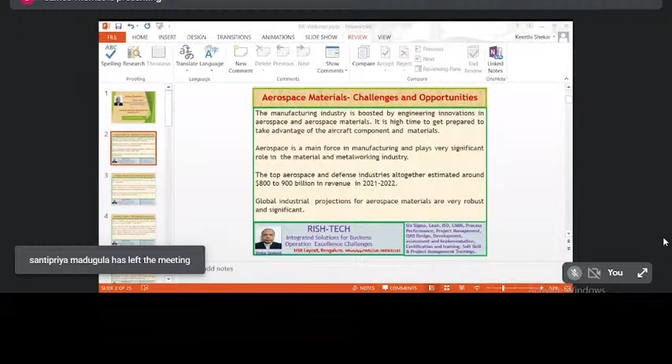At that time, nobody knew about FRP. What is FRP, how to use that, nobody knew. We went to France, and for 1 year we got trained. Our scientists stayed there for 1 year, trained in the minimum basic knowledge about FRP and how to manufacture FRP components and all. After 1 year, we came back to NAL.

A CFC wing division was newly formed to manufacture the wing components for the Light Combat Aircraft, LCA project. After we came back, we established all the hangars, jigs and fixtures. Material came from France, and even a few scientists and people to help us also came from France.

We did the first wing molding and we were happy to see it physically. It came out fantastically, but the material properties were not met. Even the French scientists struggled hard to find the root cause, and they were unable to find it. We struggled a lot because it was a 400 crore project. We couldn't succeed after 2 years. It was a total disappointment.

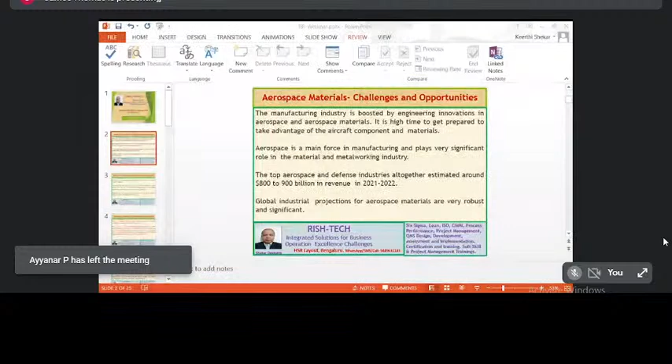Now it's come today to 2020-21, they started using the same technology in house construction or pillar construction, to reduce the iron and increase the strength of the pillars and reduce the cost. Now they started using it for pillar construction.

Sorry for the disturbance, sir. Sir, at the top, slideshow is there, no sir? Just click on slideshow, sir. See, I'm using the same slideshow only. See, once, slideshow from present. Correct sir, click on it. Sir, you can cancel it, actually. You can go for 'from current' slide, sir. You can click it sir. Exactly the same thing I did, madam, current slide only. See, this is the one that's coming maximum. So what is the problem? I'm not able to see your problem. Okay sir, no problem, you can continue. Okay, because I know the presentation, normally we will put it in full slide only.

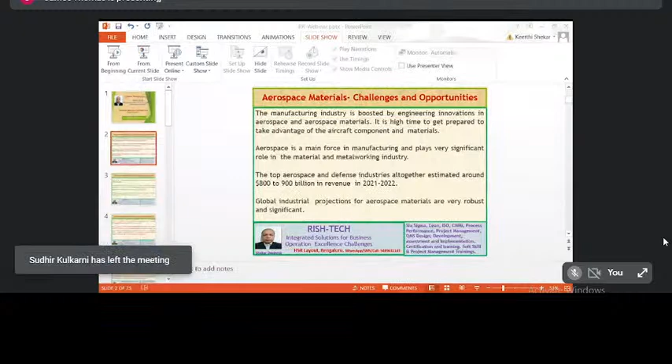Okay, see, now it is started being used in the home building industry. If you see, from 1992 to 2022, in a span of 20 years, FRP or fiber covered the entire world, including medical - it covered the entire world. So any innovation in the aerospace industry, because of the greater demand of aerospace requirements, slowly, if you develop anything for aerospace, finally it will go into a common man's use. It becomes a household requirement. Why I gave this example is because investing in the development of aerospace material or aerospace component manufacturing will definitely not be limited only to aerospace, but will be applicable to every sector. Finally, it will reach every common man.

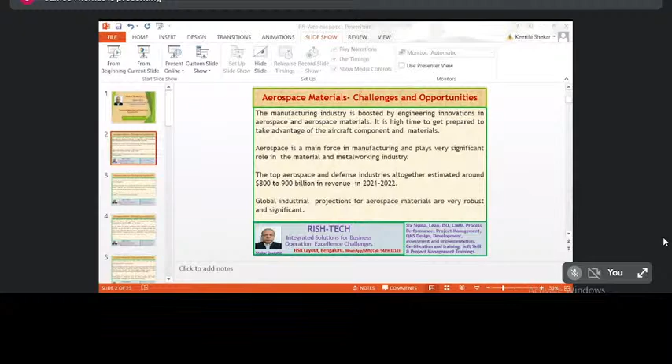Now you see increased demand for commercial air travel, commercial space travel, and a rise in defense spending. If you see the defense budgets of several countries, India is in fourth position in the world for defense budget. And in India, not even 10% of the people can afford commercial air travel. Commercial space travel is a little bit away for India, but it has started in the entire world. If you take 75% of the countries in the world,

they have not even covered 10% of their travel by air. And also, almost 90% of the countries in the world are very, very far behind in space technology, scientific space, not even commercial space.

And if you see the huge demand in upcoming defense requirements, the changes happening in the war field, war technology, if you see all these three critical areas, there is tremendous growth and potential growth in the aerospace industry. Why this is important is, today the people working in the research area, development area, and manufacturing area, and the people working in universities and engineering colleges, they need to give more importance to developing this material and solving these industry problems, because this will cover the entire world.

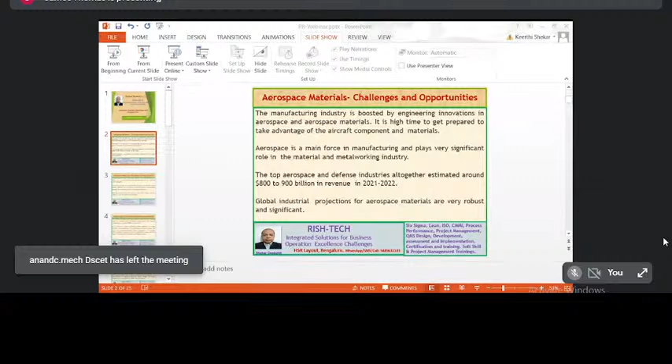So there will be a total shift in the basic fuel, and electric energy will become predominant. From this perspective, now the material we use in aerospace or aircraft has to be changed, because the material property to sustain that electrical energy — its impacts, influences, conductivity, resistance — will become predominantly applicable in this industry.

So this is the third main aspect of the opportunities, and also the challenges.

Next, if you see the combination of a growing consumer base and low operating cost, this will benefit aerospace component and material manufacturers, and original equipment manufacturers in the future. As I already told, only 10% of the people in 90% of the countries are using air travel, and commercial space travel is not even 1%. Can you imagine how much the consumer base will expand?

The main difficulty in expanding the consumer base is the operating cost. In India also, several companies are trying to bring down the operating cost of aircraft. When you are able to operate at lower cost, mainly the operation cost includes the fuel. When you achieve this, automatically the consumer base will expand. Once the consumer base starts expanding, then there is huge growth.

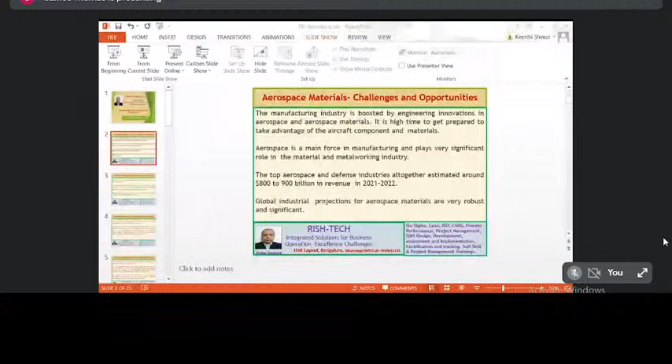For nearly a century, the aerospace industry has relied primarily on aluminum — sorry, this is 1915, there is a mistake here, this is 1915.

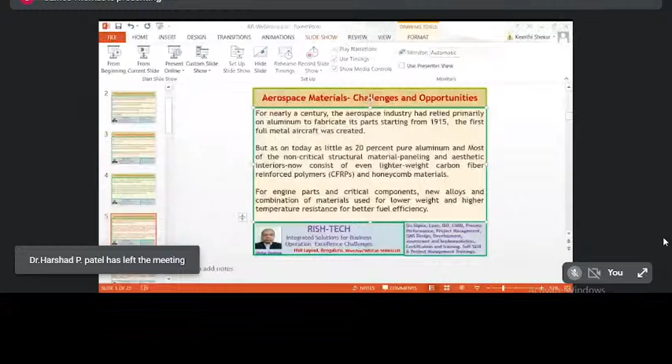The first aircraft manufactured like a flying machine was in 1915. From that starting point, to reduce weight, until recent times, most machines over the past many decades were developed mostly from aluminum.

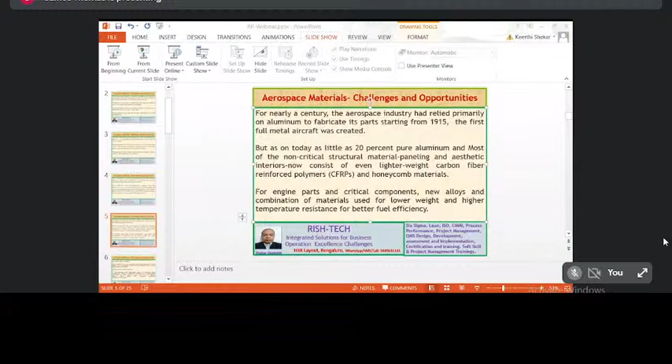There was also a big challenge at that time: the raw material, aluminum raw material we used to call a billet, used for structural components. We couldn't get that supply anywhere except the US and Germany, especially Germany. Germany is number one in metallurgy, only they were able to manufacture that kind of high quality material.

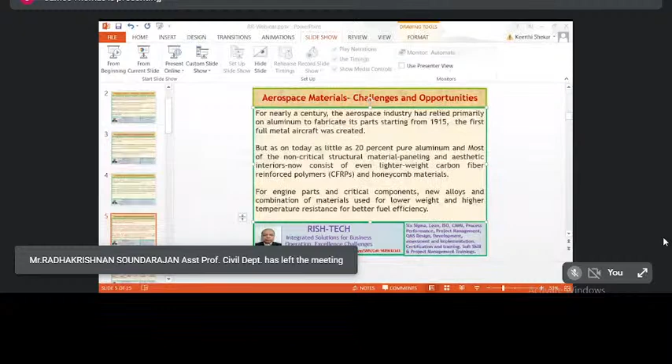To get that material imported to India, for example for one fuselage frame, to get enough material to manufacture one frame we used to work for 2 years. We used to pay the money, pay the insurance, all other things, just to get the material in 2 years. Then manufacturing, design, proving, finally it goes to assembly. Parts sometimes used to take from 1.5 to 4 years. I'm just giving you a picture of how much time it costs.

Even today, if war is suddenly declared, you have to think about how fast we can manufacture new combat aircraft, bombers, or fighters. That is the key thing. For that, key materials - where do we need to get the material? Is it possible to manufacture ourselves, or which country do we have to import from? Is that country our friendly country or not? There are a lot of other aspects behind this.

When you see these restrictions and sanctions, it happened with the LCA after we tested our atomic bomb program. Suddenly the USA imposed sanctions on India. Our LCA or Tejas aircraft project was delayed by 4 to 5 years. They denied the technology for testing the aircraft. We lost more than 600 crore rupees almost - whatever money we paid, we didn't get back because we had to test our software on their structure. Everything we lost.

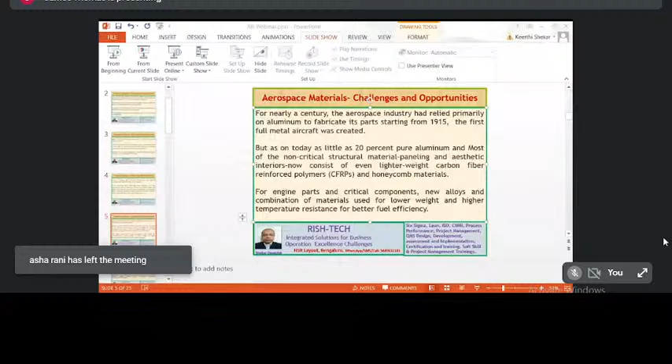For example, even today, a commercial passenger aircraft like Boeing or Airbus - except China, no other countries are capable of manufacturing and operating one. Recently in India, around 15 to 20 seater small indigenous aircraft started being used, operating commercially last month in the East India region. But even today, if we want a passenger aircraft, we need to go to Boeing or Airbus. We don't have any other choice.

But what is the population of India? What is the expansion growth in commercial travel? If we consider that, how many aircraft do we need, how much money do we need to spend on that - this is another primary factor we need to consider in the opportunities.

But you know, today it's around 20% pure aluminium, whereas back in 1915 it was 100% aluminium - no question of alloys, no question of composites, no other materials. Today, after 100 years, it has drastically reduced to just 20% pure aluminium, and most of the non-critical structural materials like paneling, aesthetics, interior are now made with lightweight carbon fibers and honeycomb material. That means 80% of the aluminum requirement in the aerospace industry has been reduced.

Also, if you see globally, earlier aluminum was used for ships and marines, and nowadays we use aluminum alloys for engine components, even for submarines.

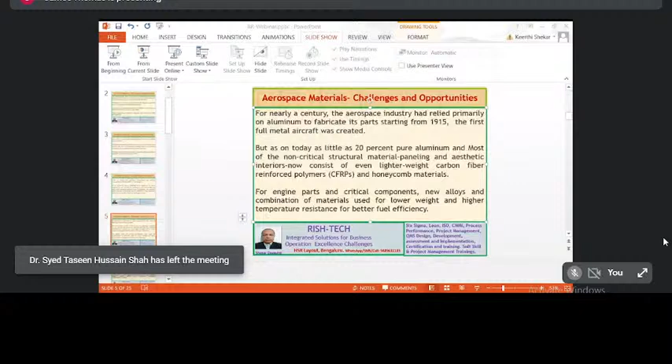When it comes to combat aircraft, it will be 4 to 6 times the speed of sound required. When you want to manufacture such high speed flying machines, what about the corrosion, wear and tear? What about natural electricity conduction, like lightning or anything else? All these things will be influenced very critically.

Still, the innovation that has happened so far is not able to fulfill total material requirements. I always suggest to everyone in the field: try to do your research, your PhD, or your research for material development, keeping this first primary factor in mind.

Second is composite material, to reduce weight and enable easy manufacturing of the aerodynamic surface. The biggest challenge is the aerodynamic surface. Composite materials are lightweight, which enable manufacturers to build aircraft that are more fuel efficient, ultimately safer for passengers.

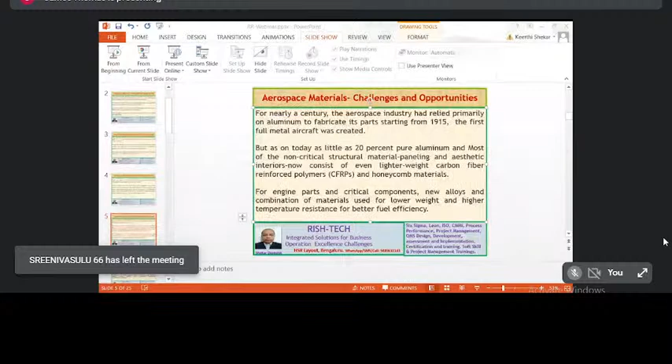Now coming to other challenges in parts manufacturing: cost of material, sourcing of material, development of quality material, chemical composition, and metallurgy are very challenging and critical. But now, with the use of composite materials, FRP materials, and other chemical-based materials, the manufacturing of metal alloys and production complexity has been reduced.

After 2 years of waiting, when we get the aluminum alloy material for manufacturing aircraft components, if it fails in testing - because we have to do ultrasonic testing, X-ray testing, and other kinds of testing to study the microscopic structure - then after rejecting that material, we have to wait another 1 or 2 years. This was the earlier situation, but now dependency on these critical alloy materials itself has been reduced.

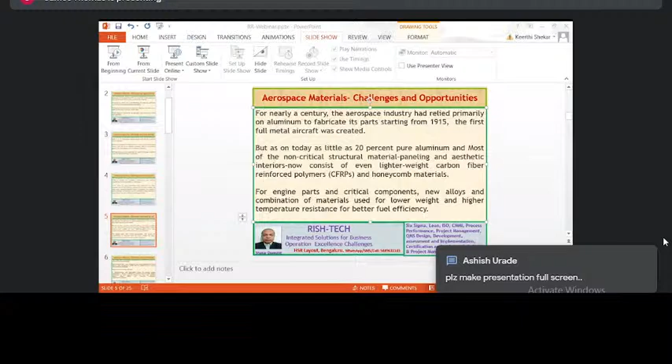Next is the production time. When it comes to production time, these composite materials we can produce in mass and fast. But machining is not like that. If we take aluminum or any other composite alloys, we need high precision CNC, computer numerically controlled machines.

You know the cost of one Cincinnati machine? Today it will be 10 to 15 crore rupees. Such a high precision CNC machine and machine centers is not manufactured in India. We need to get it from Germany, US and Japan. Most of the CNC controls use the Fanuc system from Japan. That procurement time, operation, repair, everything matters.

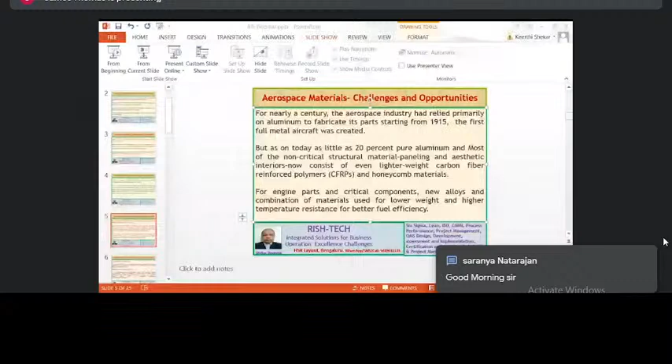And such high quality machining centers, their maintenance, their cost, power cost, electricity cost - not only the power cost, there are some other practical issues. You may feel funny, I will share one or two of these practical issues. In HAL, we used to use a Cincinnati machine. At that time, the machine was worth 6 crore rupees.

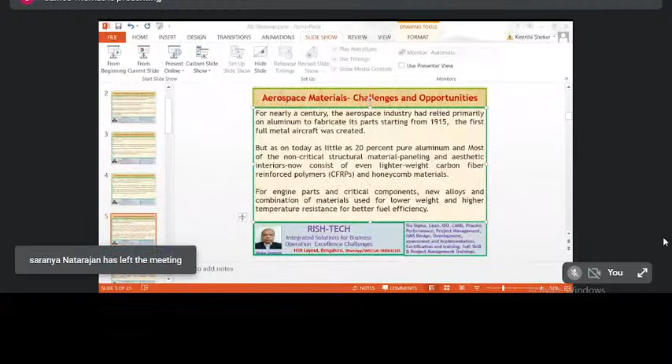And when machining is going on, aluminum parts machining is going on, suddenly power will go off. For Indians, power cut or power gone, it may come back in next 5 minutes or 10 minutes or half an hour, 2 hours. It is very common. Without any notice, suddenly the power will go off.

But now see, actually in practical machining, when suddenly power goes, still the spindle will be rotating for some time. And if you see this is a tool - when power goes, the machining capability or cutting capability gets reduced, and it becomes like a rubbing action. The cutter will be rubbing with the material.

With that huge heat, aluminum material will lose the property, and sometimes the cutter will get stuck in the material. It is like a kind of welding process will happen. It will stuck in the material. When almost a component is manufactured, only when it is doing the finishing, if this happens, then cutting the material or removing the tool without damaging the part is highly impossible.

It happened - almost all our ISRO components, costing at that time one component costing 1.5 crore rupees, we lost that component because of the power cut. A sudden power went off.

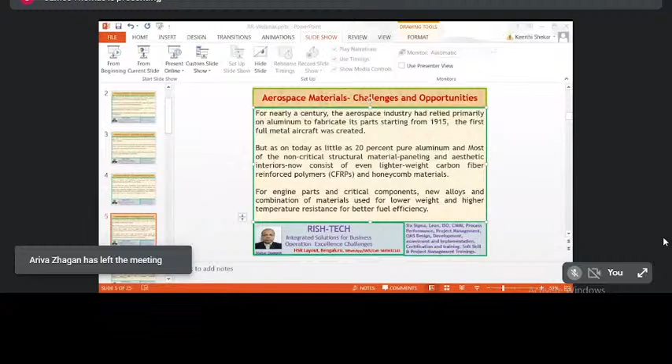Another practical problem - suddenly power goes, not only the cutting machining problem, the entire CNC machine computer parameters will get reset. When the power comes back, again we have to restart the machine. We cannot continue from wherever we left. Again we have to lift the tool, we have to go dial the reference, we have to set all the parameters, come back to the original position. That will take huge amount of skill and effort.

For this problem, when we complained to the Cincinnati manufacturers, he asked only one question: how can power go off? It is highly impossible for the power to go off. You people are kidding, there is no chance of power failure at all.

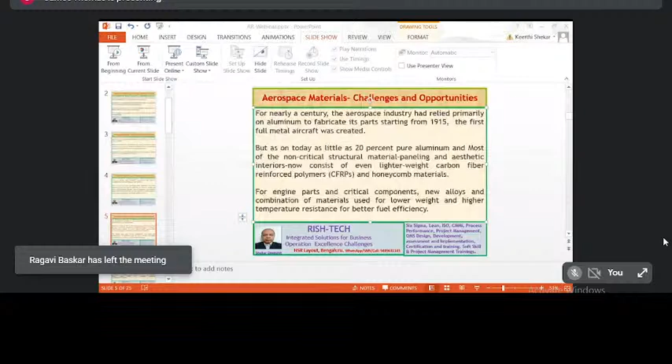Okay, such country-based local factors also will matter, and the power cost, especially electricity cost - as you know, the power generation cost is increasing like anything. We have never seen the power generation cost decreasing or stable for quite some time. Always it is kept on increasing. Whatever technology comes, solar technology comes, other technologies come, and we are implementing non-conventional power, we are generating, but still our power cost is more.

When we go with solar aircraft or solar aerospace applications based on solar energy, then definitely operating cost will come down. But to generate the solar cells, we need classic materials to generate the solar power or any other kind of power. For that also we need new age materials. That is also one of the challenges and opportunities.

And material property retention - like all your chemical and mechanical properties in high cyclic load and long exposed environmental conditions like marine or spacecraft, erosion, corrosion and other natural forces will be a very big challenge. Because nowadays the biggest operating cost, one of the biggest operating costs, is the maintenance cost.

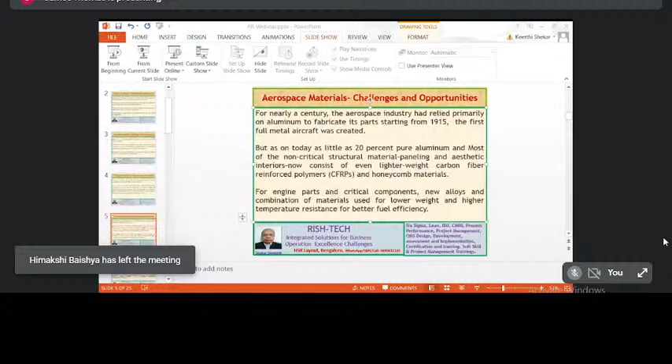After we manufacture components with 10 micron accuracy, when it reaches assembly, sometimes that will be a fun, to be honest with you. Sometimes parts are not easily getting assembled, and they need to use a little bit of force. At that time, they lose this precision, 10 microns gone. So such difficulty in assemblies also matters.

Then machine tools - designing, manufacturing, operating, maintaining such precision, high cost machine tools. Technology of machine tools will be another important factor. Precision machines and automation, because it should be machined and assembled by automation only. It is very difficult for humans to reduce the time and increase the accuracy and functional efficiency.

And tolerance - if you go for composite or other materials, then tolerance will be okay, very easy, because you need not machine. So attaining the tolerance in composites will be easy compared to machining components. Then the skill set of operators, human technology, running or operating cost of the hangars, assembly, manufacturing, storage, transportation - all this will play key roles.

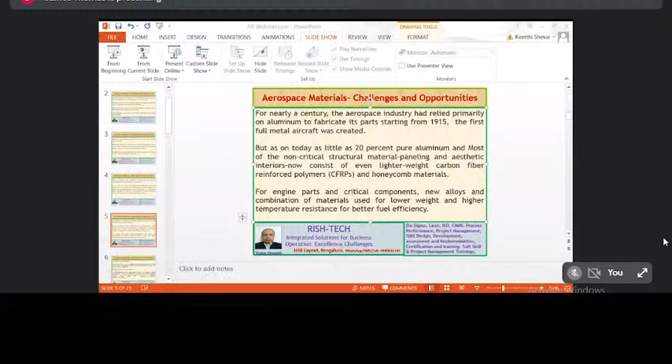What I suggest for people who want to enter, who are looking for business opportunities - they can select one of the challenges whatever we listed here. They select the challenges, and whatever they're interested in, they can start innovation and development in these areas. For example, machining cost of aluminum alloy.

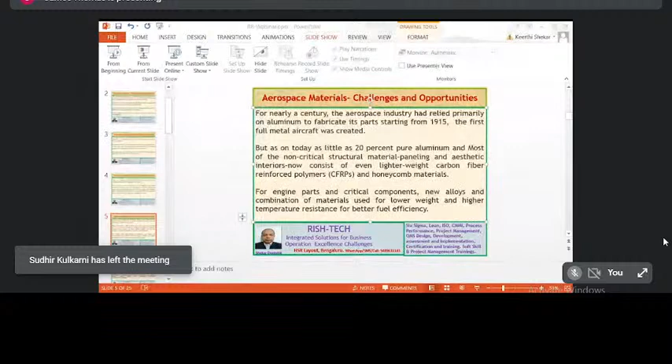Somehow if you reduce this aluminum alloy machining cost by just 1%, especially the power required for the machine tool, the current required for the machine tool - if you reduce 1% of the consumption of electricity, globally the commercial value of that 1% will be $7 to $15 billion. Can you imagine? To make it simple, if we reduce the hardness of that aluminum alloy without affecting any of the mechanical, chemical, and other engineering properties, by just 1%, and if it is able to consume less current by the machine tools, the global commercial value will be $7 to $15 billion.

You need to select these challenges, and you need to nail down what perspective you want to develop, what innovation you want to do, what research you want to do, what is the global impact if you are successful. Keeping that in mind while doing research or finding business opportunities.

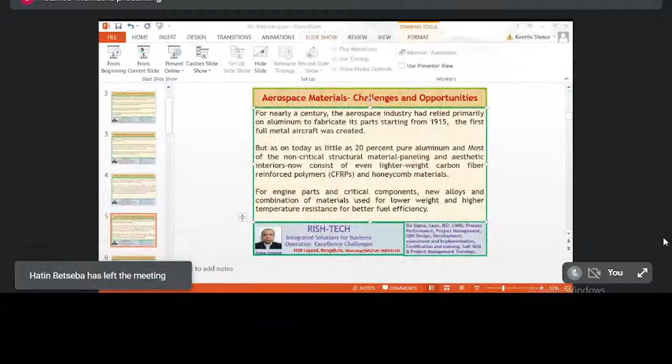Have more value. Also, initially there will be difficulties and challenges, but as engineering people coming forward, you may feel initially you may not be earning as much as a software industry person will, but in the long run, software people can sustain only for some time. In technology sector, they cannot sustain for a long time. But aerospace is not like that - there will be a long period of sustainability, and a long period of development will be there.

So now, first part is completed. The major point I wanted to tell you is completed. In the second part, I will give examples of some of the materials used in aerospace. Right now, it will take another maybe 30 minutes. In case if you want a 5 minute bio break or any break, I am fine - please let me know.

Raja, ready? Shall I continue or do you people want a break?

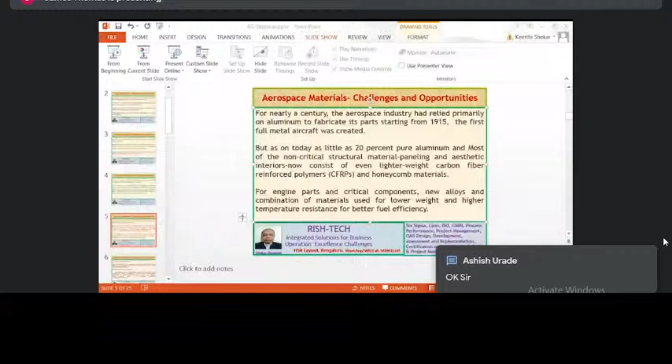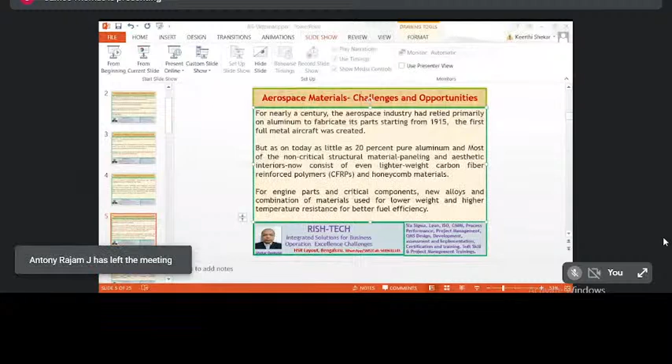Titanium 5553 is another metal that is reasonably new to aerospace, exhibiting very high strength, lightweight, and good corrosion resistance, for major structural components that need to be stronger and lighter than previously used stainless steel or aluminum, and the tungsten alloy. Composite materials also represent a growing piece of the aerospace material pie.

They reduce the weight and increase fuel efficiency while being easy to handle, design, shape, repair, transport, etc. Once only considered for light structural pieces or cabin components, nowadays it is used in several components, including the fuselage skin or aircraft cover, outside covers, some engine parts, and some landing gear parts also—now they've started using it.

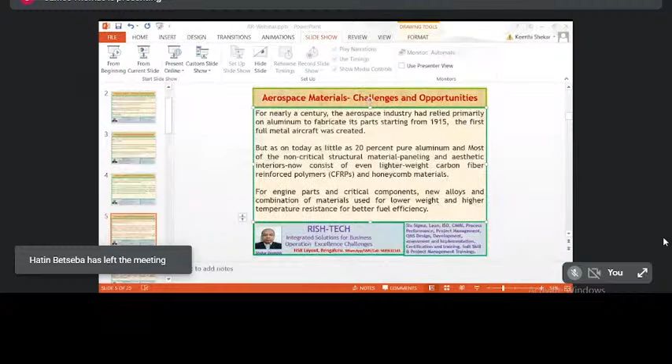Composites can be formed into complex shapes. Metallic parts would require machining and create joints, but for these composite components, joints are very few and no machining is needed—we can develop them by forming.

Preformed composite components are not just lightweight and strong, they reduce the number of heavy fasteners and joints like bolts, nuts, weldings, joints—all those things which are potential failure points within the aircraft. Because of high erosion and corrosion, these fastener failures will be very critical.

In doing so, composite materials are helping to drive an industry-wide trend of fewer components in overall assemblies. Especially, it reduces the joints and fasteners, which helps a lot with erosion and corrosion resistance.

Next-generation materials include ceramic matrix composites. This is a very emerging, practical material. CMCs are comprised of a ceramic matrix reinforced by a refractory fiber such as silicon carbide. They offer low density per weight, high hardness, and most importantly, superior thermal and chemical resistance.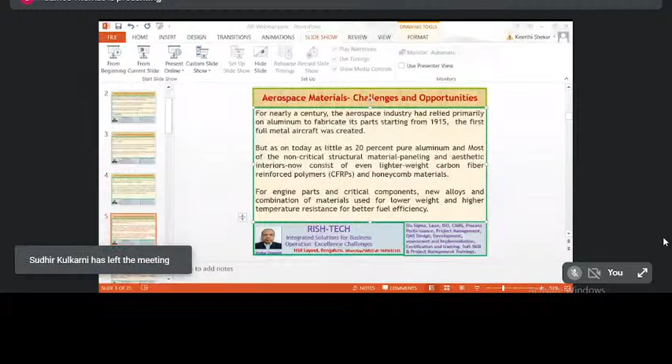Like carbon fiber reinforced polymer, they can be molded into certain shapes without any extra machining, making them ideal for internal aerospace engine components, exhaust systems, and other hot zone structures, even replacing heat-resistant super alloy materials.

Next, polymer nanocomposites. Various nanocomposites have been used with success in aircraft construction as filler materials to enhance the properties. The most commonly used are carbon nanotubes, nanoclays, nanofibers, and graphene.

These carbon nanotubes have gained more popularity for their use as a filler in various polymers due to their exceptional stiffness, toughness, and unique electrical properties. The CNT electrical properties were utilized for advanced electrostatic charge dissipation and electromagnetic interference shielding of satellites.

These nanoclays are used frequently in aerospace manufacturing due to their flame retardant properties combined with high strength, low weight, and relatively low cost.

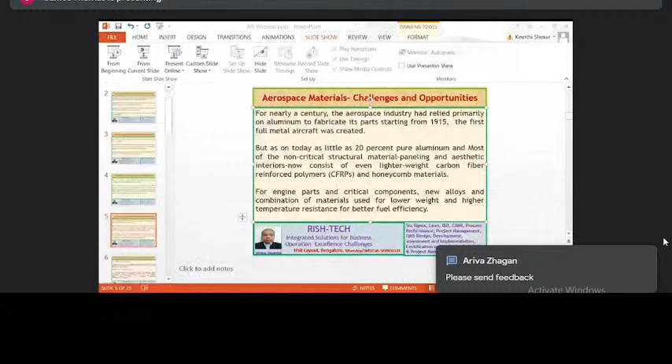Then tribological and anti-corrosion coatings—this is another key critical field of aerospace materials—by adopting nano coatings such as on magnesium alloys to increase the durability of the metals. On one hand, magnesium alloys are far lighter than steel or aluminum. However, they are compromised by their susceptibility to corrosion caused by the high chemical reactivity of magnesium.

The most widely implemented solution to combat corrosion is to use a surface coating. However, chromium-based coatings are favored by manufacturers. Now, nanomaterials used as an alternative to chromium as an anti-corrosion coating include silicon and boron oxides and cobalt phosphorus nanocrystals. However, a suitable coating for aluminum—widely used in aircraft structures—comparable in performance to chromium is yet to be developed, and poses one of the most pressing challenges for the sector.

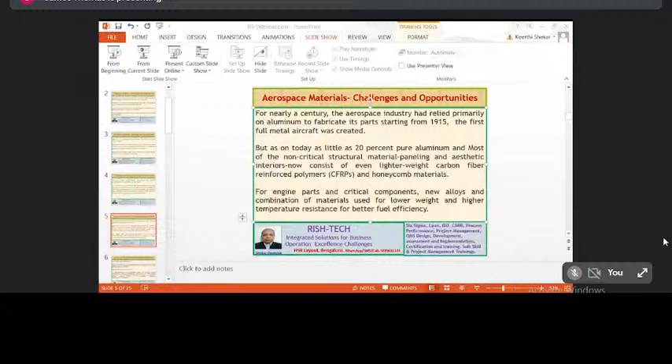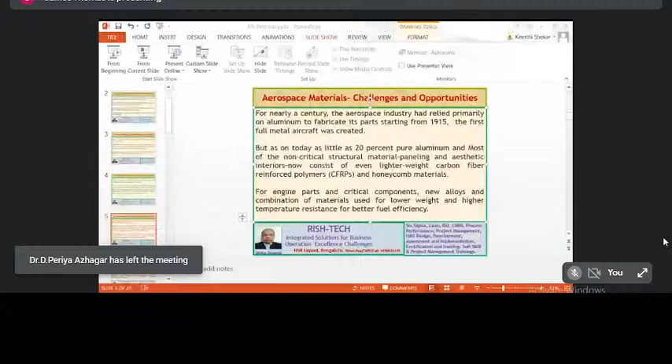This is another key thing: erosion corrosion. Developing anti-corrosion coatings is not only for aircraft—today it is very much applicable to marine, automobile, or anything. Take your own mixie, your own ordinary machines—for people staying in coastal areas, it is the biggest challenge.

The heterogeneous surface of aluminum renders it particularly vulnerable to corrosion, the rate of which is further accelerated by the inclusion of alloying elements and precipitates. Current research has identified magnesium nanocomposites as a promising alternative.

Nano coating is used to prevent chemical corrosion, and is also applied to mechanical components subject to high temperature and friction wear, such as turbine blades. These coatings can drastically lower the friction coefficient and improve resistance to wear and tear, significantly improving engine efficiency and helping to reduce fuel consumption.

Many nanostructured and nanoscale coating materials have been suggested as possible friction modifying agents, including carbides, nitrides, metals, and various ceramics.

Nanocrystalline materials enable lighter structural materials and more efficient engines. The uniting goal being to curb fuel consumption and carbon emissions associated with aerospace.

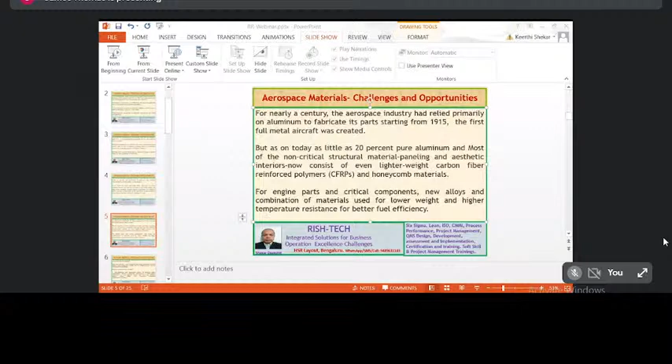Another exceptional advantage of polymer nanofillers is their inherent defect-free structure at the crystal level. In all metal-metal alloys, defects in the formation of the crystal structure will reduce the strength of the material. That is another key area where we need very strong metallurgy.

As a result, their resistance to deformation is far superior to that of larger polymers. Considering the extreme loads aerospace vehicles are subjected to, this has the potential to reduce the time and cost incurred for maintenance.

Properties crucial to aerospace applications are primarily yield strength, tensile strength, corrosion resistance, and low density to facilitate substantial reduction in structural weight. All these things can be achieved by a nanostructured titanium nickel alloy, which is a combination with extraordinary yield strength and superior super elasticity.

Key requirements of the industry: if you look at the summary, the key requirements of the industry include complicated thermal management, the impact of material properties due to the huge amount of electricity needed to reach hypervelocity, stress, time, temperature, and environmental media during usage, machinability, and energy and material efficiency.

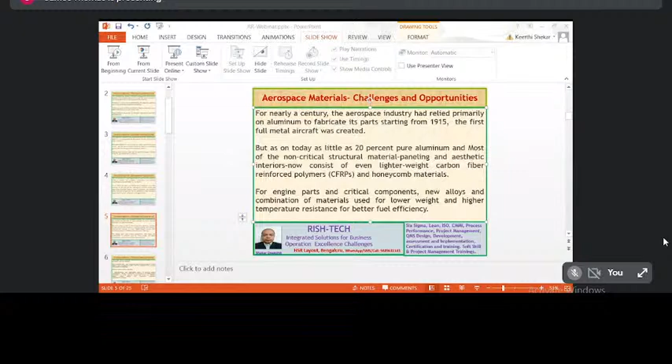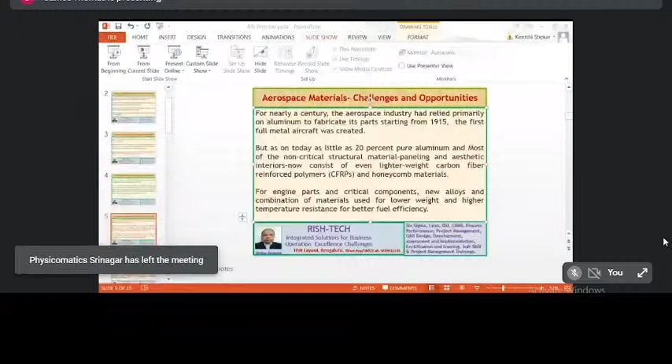This also leads to extended part life. See how it got developed: single materials to composite materials to nanomaterials - this is the path. Then what is next from nanomaterials? What is the future?

So in conclusion, the aerospace sector drives innovation in many industries. High performance military and transport aircraft require exceptional materials which will eventually make their way into commercial vehicles. Once something starts in aerospace, it eventually reaches the common household. This covers the broad applications, opportunities, and challenges of aerospace materials in today's modern industry.